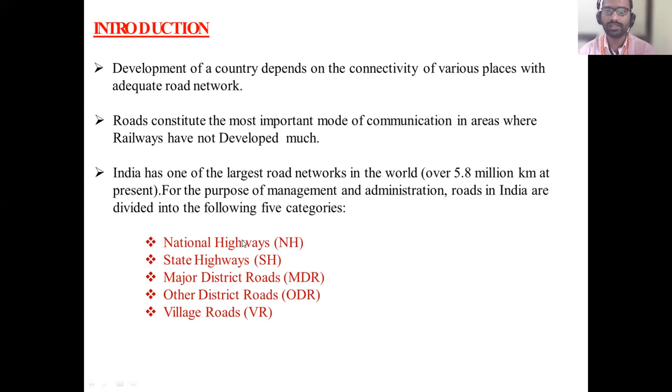Apart from these 5, there is one more, that is expressways. Expressways will come at the top. When it is called an expressway, the speed of the vehicle is higher than that of the national highway, then that way is called expressway. That will come at the top. Recently we have taken that one.

So in the last class we discussed national highways. When is a highway called a national highway? These are the backbone of the road infrastructure, meaning the highway connects every major city of India, with ports, and capitals of the states, etc.

The major cities, capital cities, capitals of the states, major ports - highways which connect every major city of India, with ports and capitals of the states are called national highways.

Then what about the state highway? State highway usually refers to roads that link important cities, towns and district headquarters within the state, and also connect them with the national highway or the state highways of adjacent neighboring states. These are called state highways.

Then major district roads connect areas of production - that is agricultural production - the main agricultural market, and state and national highways crossing the state. These major district roads connect the areas of production, main market, and state and national highways.

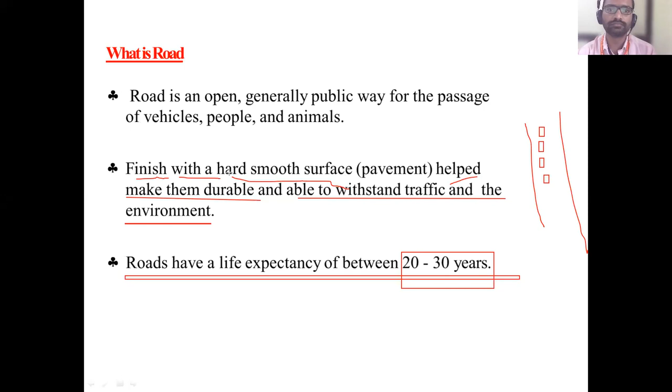Next, I have told one term, pavement, correct? A smooth, hard surface - what is this pavement called? We will see that pavement.

A pavement is a multi-layer system that distributes the vehicular load over the larger area. Consider this is a road surface, and this is the natural ground.

Where is our road? This is the road. So from this natural ground to the top of the road surface, there is a filling - with other types of materials, they will put, compact, and build it up. This is the road surface. Pavement means this is a multi-layer system - multi-layer means more than one layer - that distributes the vehicular loads over the larger area.

Consider there is one vehicle. For this vehicle, consider this is the vehicle, and this is its front side. This is coming - this is the cross section of the road.

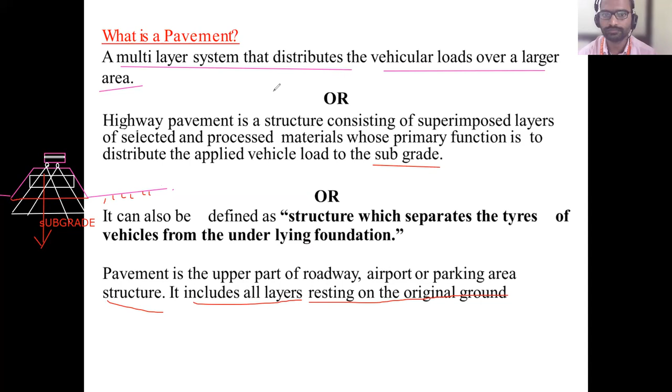Yes, sir. So there is a picture, when you look at the picture you will come to know. See, this is the road, this is the top surface, there is one type of material, there is another type of material. This is the natural ground. Over that ground, there is a filling. So over this top surface, the vehicle is moving. Is it visible on screen? Vehicle wheel? Yes, sir.

What is happening with the vehicle wheel? This is moving. There is a contact surface. How much is the contact surface? This much is contact surface, see this dotted line. So this is the contact surface initially. As the height, that is the thickness of the pavement, increases, the load is going to spread. It is distributing to a larger area. Hence, what do we call this entire structure? Pavement. Stable. This is called as pavement.

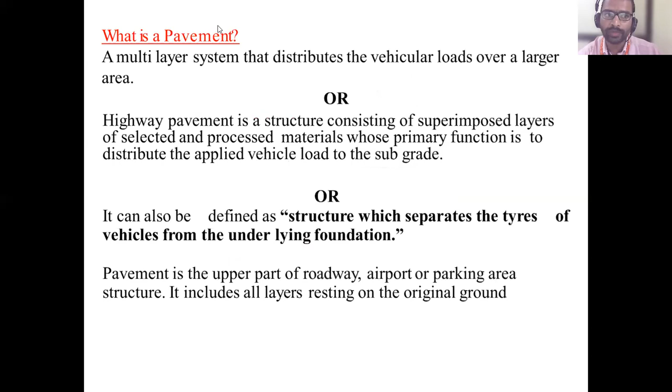So pavement is a structure which distributes the vehicle loads to a larger area at the subgrade. This is called as stable subgrade, subgrade it is called. So on top of this subgrade, what do we put? A 6 inch dense graded aggregate sub base course.

This is the 6 inch dense graded aggregate sub base course. Next, what do we put on top of this? A 4 inch hot mix asphalt base course. Think of this as a flexible pavement, that is, a Dambar road. You have seen Dambar road, correct? So before they put the Dambar, what will they put? They will put 4 inch hot mix asphalt. Before that asphalt, they are putting 6 inch dense aggregate sub base.

Before that, this is a natural ground. This is the natural ground. Over that, they are putting a stable subgrade. Next, over that stable subgrade, they are putting 6 inch dense graded aggregate. 6 inch means how much? 1 inch is equal to 25 mm, so 6 inch means 150 mm. So this entire thickness is 150 mm.

Graded aggregate, aggregate means what? Khadi, yes. So this is called Khadi, that is coarse aggregate. And sand means Balu, what do we call sand? Fine aggregate. So actually sand is also called fine aggregate.

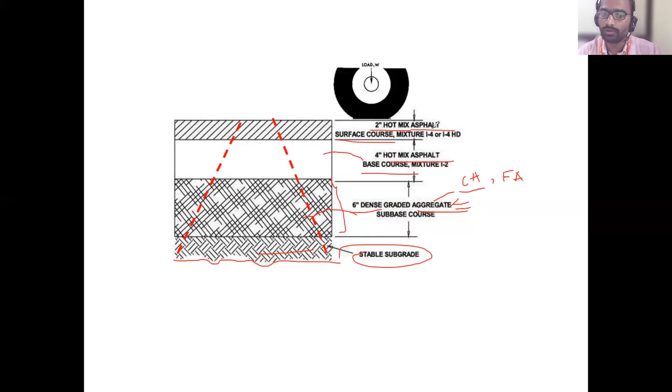2 inch hot mix asphalt surface course mixture I-4 HD - that we will see later. Above this we put 2 inch of asphalt. This is the structure of the pavement. This is flexible pavement - flexible means that is a dambar (asphalt) pavement.

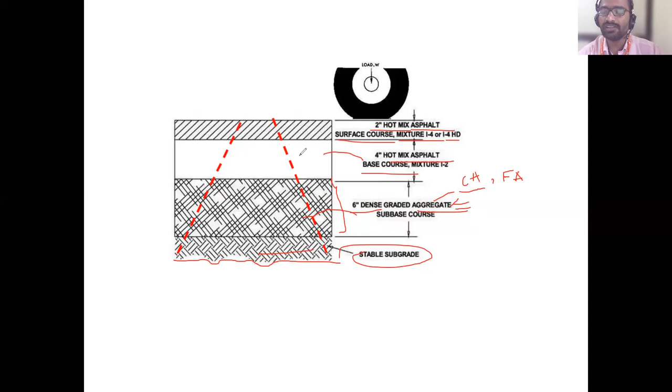There is one more type of pavement, that is rigid pavement. Rigid pavement is your cement concrete road. Is it clear to everyone? Yes sir.

Okay, function of the pavement - whatever we have studied about this pavement, what is the use of it? First one is that it will distribute the vehicular load, traffic load, to the subgrade.

Next function of the pavement: it reduces and distributes the traffic loading so as not to damage the subgrade. If you are not putting this pavement, then directly what happens? This vehicular load comes directly to the subgrade, so the subgrade gets damaged. Correct - this subgrade might get damaged.

In order to avoid this damage, we are putting the pavement. This pavement will avoid the damage of the subgrade. It will reduce and distribute the traffic load so as not to damage the subgrade - the subgrade does not get damaged. It will distribute the load.

Next, provide the vehicle access between the 2 points under all weather conditions. What does it mean? Provide vehicle access - movement of vehicle access between the 2 points under all the conditions.

If you consider this is the road, consider a two-way road - one side it is moving like this and another side is moving like this. This is one way road, this is another way road, so together it becomes two way, 2 points. Or you can consider if this is a vehicle road surface, there is one more vehicle, one more wheel - there are 2 points, you can call that also points. So it provides vehicle access between 2 points under all weather conditions.

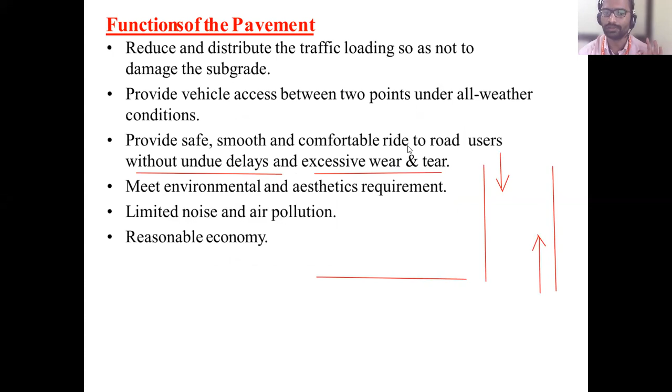That's why you have to put the pavement. Pavement will provide safe, smooth and comfortable ride, so it is comfortable for you to travel, to the road users without undue delay - so there is no lateness. For example, how many hours does it take to go from here to Solapur?

1.5 hours. So if the pavement is good, then you will go as early as possible. If the pavement is under construction, if the pavement is not good, then it may get delayed. Correct? And excessive wear and tear - pavement will avoid the excessive wear and tear.

What is wear and tear? It means it will not get damaged - excessive wear means it will get damaged. So, provide safe, smooth, comfortable ride to the road users without undue delay and without excessive wear and tear - meaning excessive damage does not happen.

Next, pavement meets environmental and aesthetic requirements. Whatever environmental conditions there are, it will resist all of them - it will meet the environmental conditions and aesthetic requirements. So by looking at the pavement, it will give a good feel, it will give good appearance.

Limited noise and air pollution. When you move over the pavement surface, the noise will not be created that much - it is very less. And there is no air pollution as such.

If there is no pavement, and you are going on a kacha (unpaved) road, will that produce air pollution or not? When vehicle movement happens on mud, what happens behind it - there will be mud dust in the air, that will pollute the air. So when there is a pavement, there is no air pollution, the noise pollution is also limited, and there is reasonable economy.

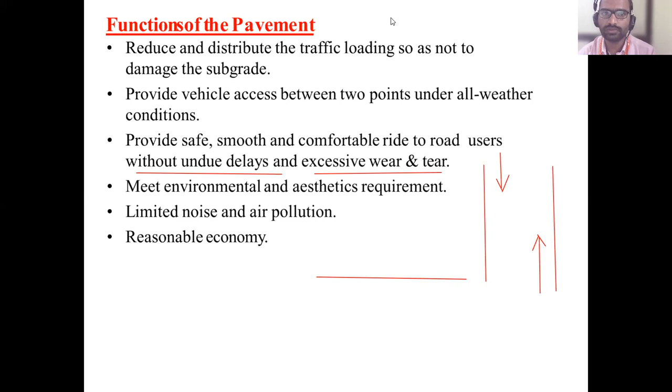So these are the important points, that is functions of the pavement. Is it clear, everyone? Yes, sir.

Okay, next, in order to do the pavement, what is required? What is the requirement of the pavement structure? First, sufficient thickness to spread the loading to a pressure intensity tolerable by the subgrade.

See, you have seen subgrade. Subgrade means the natural ground. So if the total load of the vehicle comes on the natural ground, it gets damaged. To avoid that damage, we should provide sufficient thickness.

Why provide sufficient thickness? To spread the loading to a pressure intensity tolerable by the subgrade. So whatever load is coming at the subgrade, that will be resisted by providing sufficient thickness. That is the first requirement: sufficient thickness to spread the loading to a pressure intensity tolerable by the subgrade.

Next, second one is sufficiently strong. The loads coming on the pavement should be sustained and carried, so our pavement should be strong, sufficiently strong to carry the imposed stress. Stress means load upon area. So sufficiently strong to carry imposed stress due to traffic load.

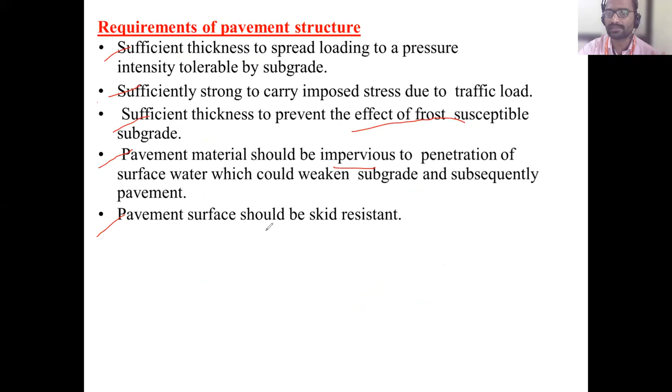So these are all the requirements. First is sufficient thickness for the pavement, sufficiently strong, sufficient thickness to prevent the effect of frost, pavement material should be impervious, and pavement should have skid resistance. These 5 are the requirements for the pavement structure. Is it clear, everyone? Yes, sir. Yes. Okay.

There are two types of modern roads: one is flexible pavement, another is rigid pavement. This rigid pavement is also called concrete or cement concrete road, CC pavement. You can also call it CC road or concrete road.

Types of pavement - there are two types: one is flexible pavement, another is rigid pavement. What is the difference between these two, flexible and rigid pavement?

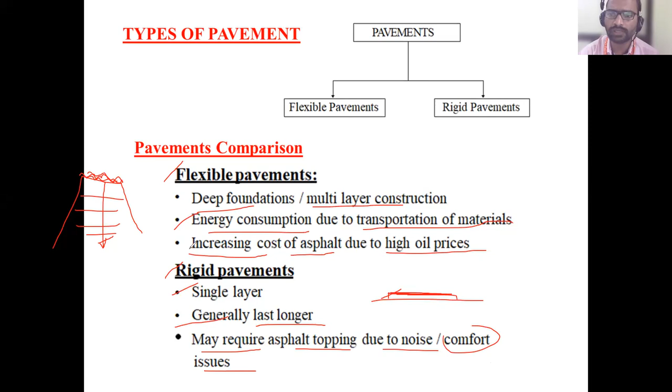Pavement comparison - heavy vehicles consume less fuel on rigid pavement. If the pavement is rigid, meaning cement concrete on top, heavy vehicles will consume less fuel on rigid pavement.

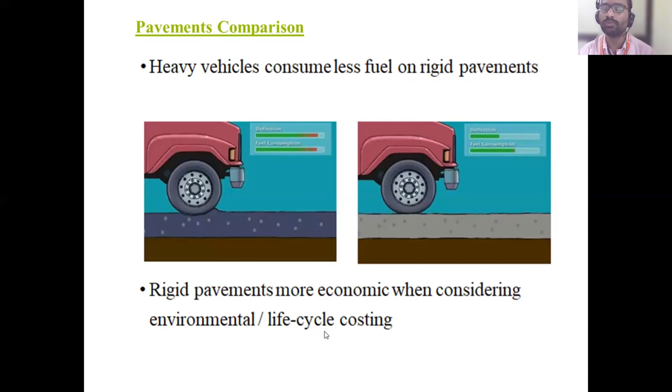See, this is rigid pavement - this is ground, and over that ground there is a rigid pavement. Rigid pavements are more economical when compared on environmental life cycle costing. This is because when you go for flexible pavement, every 2 to 3 years the top surface of the pavement is going to get damaged, so removing, brushing and refilling the damage will not give much economy. So rigid pavement gives more economy.

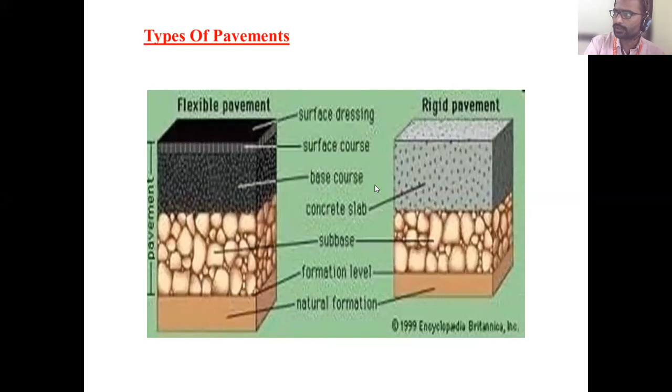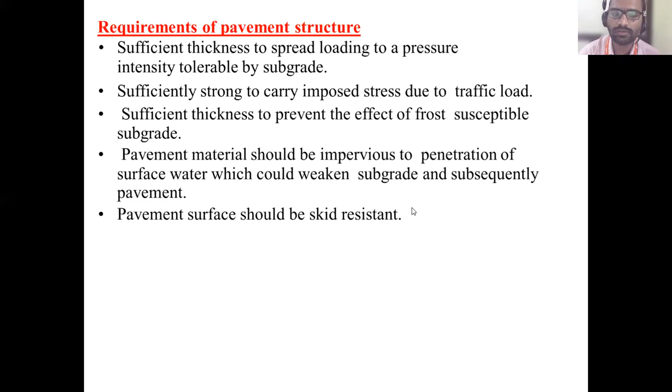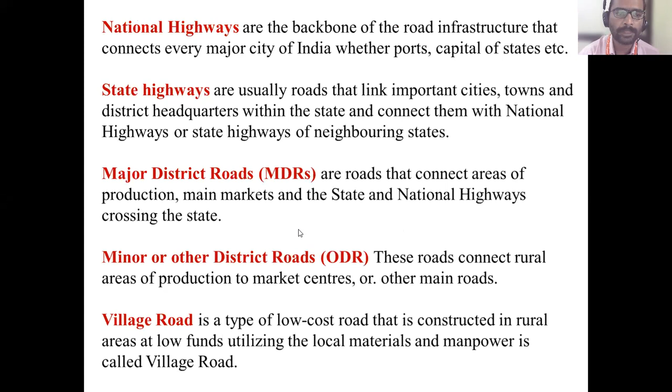Yes sir. Today you can write the road. What is road? Only what is important, that much you can write.

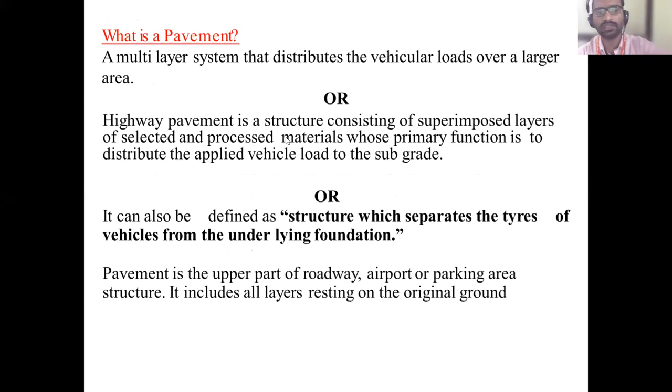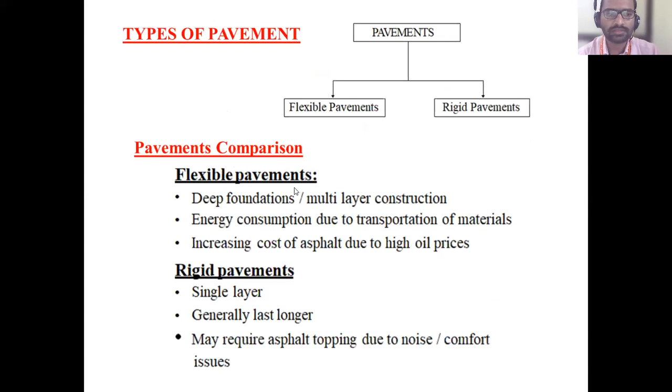What is pavement? I gave you 3-4 definitions. Whichever interest you have, you can write. Just take the picture. What is the function of pavement? Requirement of pavement. Next, what types of pavement? You can see all this.

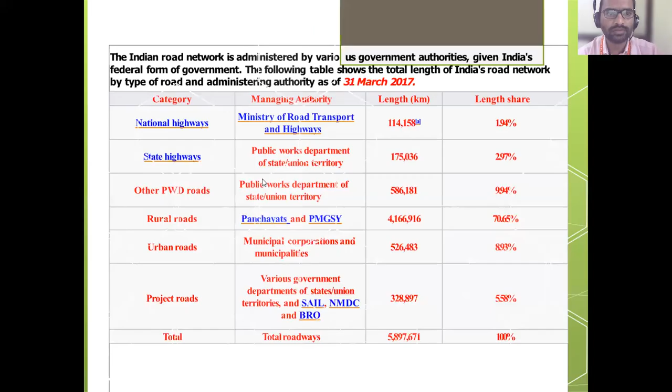Next there will be different classification. What is pavement, and there will be cross section of the pavement. How will be the cross section of the pavement? We'll see in the next class.

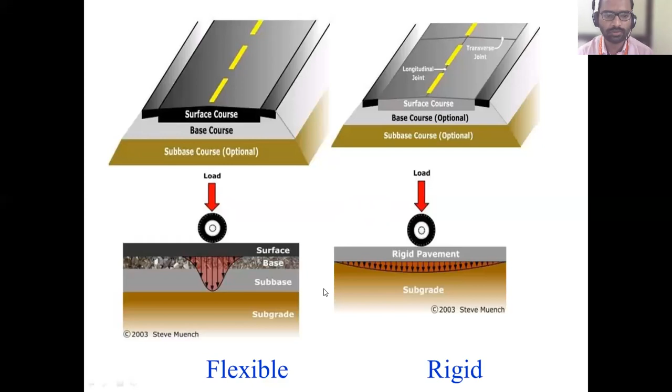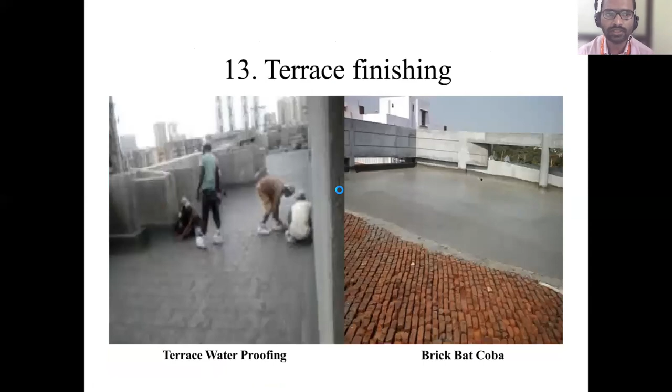There is still 5 minutes. What all we will do? Whatever you are writing, have you written all these branches of civil engineering in your notebook? Have you written or no? Yes sir, all of you.

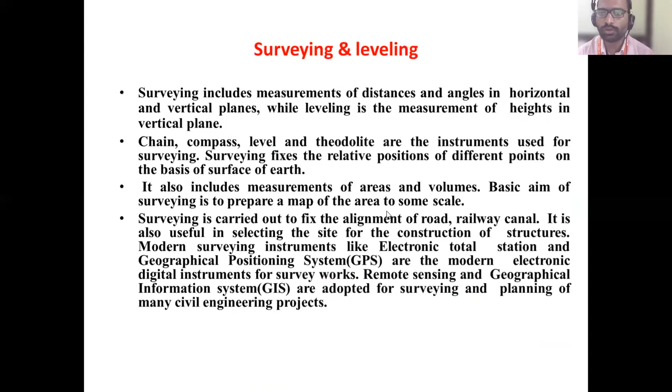Yes sir, you have to- Okay, I will ask one by one randomly, like roll number 20. Open your notes and show me all these things, whether you have written or not. I will ask randomly. Now roll number 20, turn on your video and show me your notebook where you have written or no.

Roll number 20, see already some people have left the meeting. Roll number 29, roll number 25, are you writing? Is there, are you there in the class or no? See already, roll number 30, are you there? No, you are not giving response.

Are you writing all those notes? Yes sir. Okay, can you turn on your video and show the notebook? Just verifying whether the student is alert or not. Show your notebook, show your notebook.

Good, okay, so roll number 55. Are you present? Yes sir. Are you writing notes or no? Yes sir. Can you show me your notes? Yes sir, okay you can turn on your video and show me.